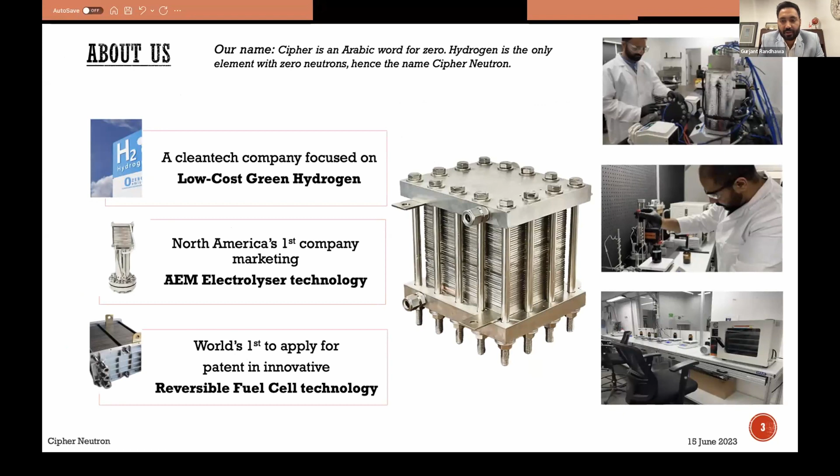So what is Cipher Neutron? We are a privately held company in Toronto, a Canadian company that focuses on low-cost green hydrogen solutions that include AEM electrolyzers. We also have a patent-pending innovative technology called reversible fuel cell. In this presentation today, we will talk more about the AEMs that we have, and then we'll touch a little bit on the reversible fuel cells.

I think it's very important - I know it's a hydrogen conference, and there will be people who already know hydrogen listening to this presentation. But it's very important to understand what the real market is and what the needs are for hydrogen, because whenever we discuss hydrogen, people usually think of hydrogen cars running, hydrogen IC engines, which are coming. I call them emerging markets. But the bigger section is existing markets - that's Cipher Neutron's focus.

If you look at the oil and gas industry, fertilizer industry, the butter that we eat every day, chemical production, mining industry, ore reduction - all these processes, all these sectors, they use green hydrogen or hydrogen. At this stage, they're using gray hydrogen, but the plan is to slowly adapt or change to green hydrogen markets. This represents billions and billions of dollars of market, and the expectations for 2030 and 2050 are into trillions of dollars of market.

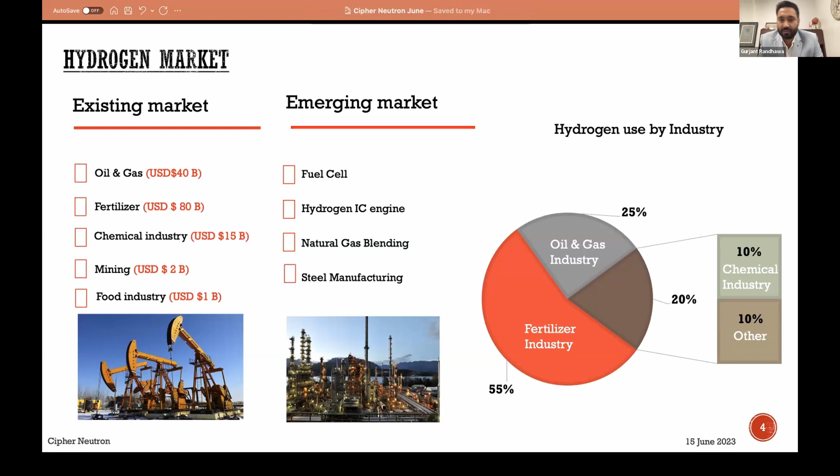So again, for all the electrolyzer companies out there, I don't see any competition at this stage. There's enough green hydrogen to be made. So again, we need to encourage more companies and encourage new technologies.

Existing production methods - as we know, there are mainly two ways to produce green hydrogen. If you follow the news, there are new companies every day, which is a good thing, but the existing market share is between alkaline electrolyzers and PEM electrolyzers.

Alkaline electrolyzers is a traditional way to produce green hydrogen. However, it comes with lots of disadvantages: a huge footprint, low hydrogen production, low pressure of green hydrogen produced, and a highly corrosive process.

Then we have PEM electrolyzers, which are now dominating the industry because of their high current density, meaning low footprint, high efficiency, and high output pressure.

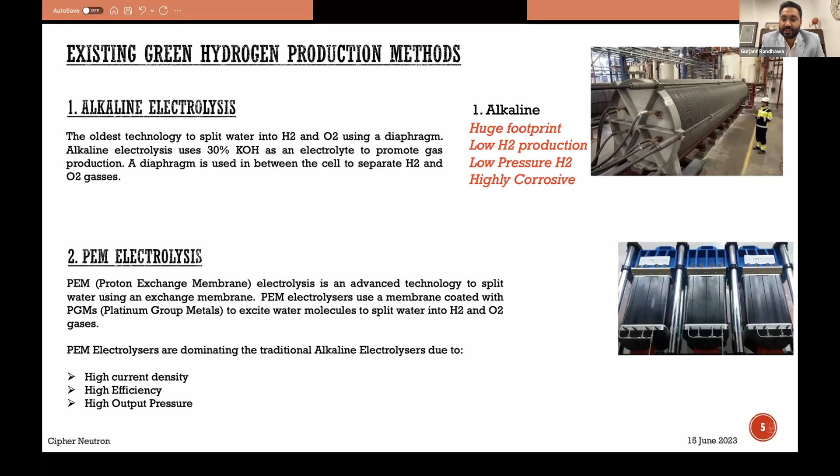However, these also come with some disadvantages, which include they are made up with PGMs, or platinum group metals. One of the key things in PEM electrolyzers to increase efficiency and performance is to use platinum, iridium, lithium - all these minerals or platinum group metals or rare earth metals. The second thing is the use of PFAS, especially in European countries now. PFAS is a big concern because the membrane used inside the PEM electrolyzers comes from PFAS.

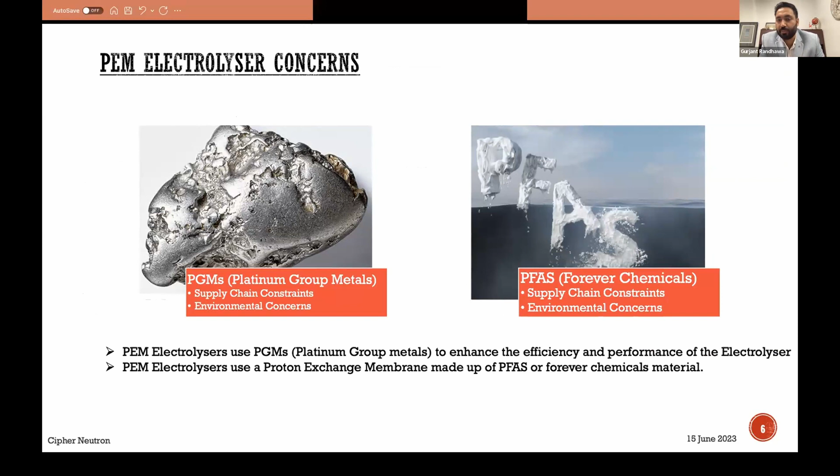Talking a little bit about the PGMs concern - because we're talking about trillions of dollars of market, we're talking about billions of dollars spent in research and development of green hydrogen technologies. But the thing is, we need to do a proper sustainability study. We do not even have enough iridium to justify the scale that we need, or the iridium that is required in the electrolyzers. So definitely we need platinum-group-free electrolyzers, and that's exactly what Cipher Neutron is doing.

Not only the iridium section, but also one thing to understand is more than 90% of the PGMs are based in South Africa. So anytime we have things like COVID-19 or some other sanctions, it will be very hard to satisfy the green hydrogen market in those scenarios.

They also have environmental impact, because then the question becomes, are we even talking about green hydrogen? Just to make 1 megawatt of PEM electrolyzers, we need anywhere from 500 grams to 2 kilograms of platinum group metals. One argument is that this number is okay because we can recycle it.

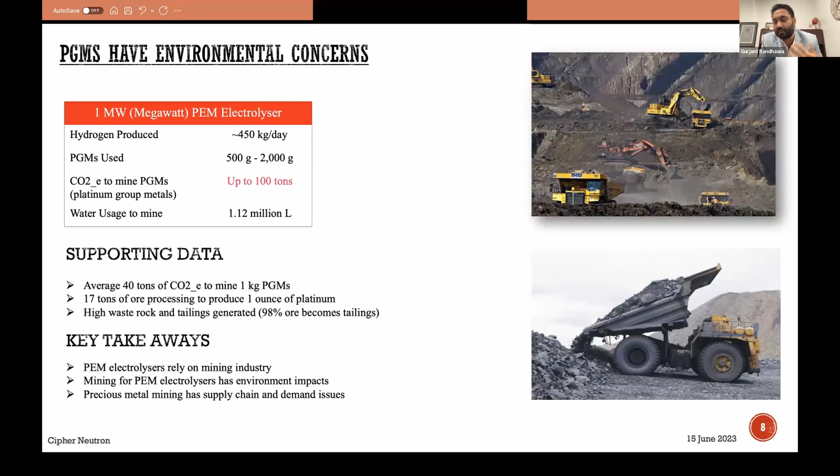The second big point is PFAS. Europe is actually looking to ban certain PFAS. PFAS are also called forever chemicals, and they can stay in the environment for thousands and thousands of years. According to the Agency for Toxic Substances and Disease Registry, PFAS has the potential to affect growth, learning, and behavior of infants and also older children. They can lower pregnancy rates and can also increase the risk of cancer.

So we need something which is PGM-free and PFAS-free. This is where Cipher Neutron's AEM technology comes into play. We have developed a highly efficient way to produce green hydrogen, and we do not use any PFAS or PGM-based minerals. We are the first North American company to deliver or commercialize AEM technology.

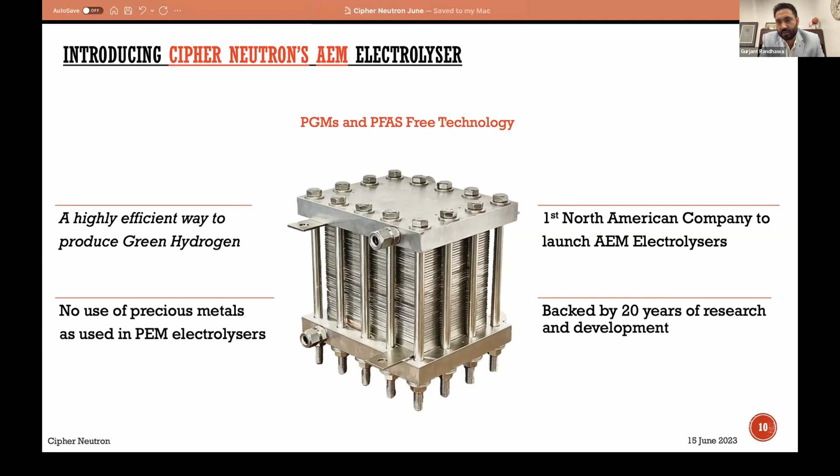Just one point to note, we are backed up by 20 years of research and development. Our partner, Dynacert, has been into research and development of alkaline electrolyzers and the green hydrogen economy generally for the last 20 plus years. So we do have the know-how, and we have huge research and development backup from Dynacert also.

The AEM benefits that Cipher Neutron's AEMs offer: we have developed a highly efficient system. Our efficiency levels are north of 80%, based on HHV levels.

If you look at the industry, the standard right now is 77%. So why is it important? Higher the efficiency means we can produce more green hydrogen with the same input power, meaning lower OPEX, operating cost.

This aligns with what the Biden administration said, and all the governments across Europe and across the world are saying, to bring down the price of green hydrogen to lower than $2 a kilogram. The idea is, if you have higher efficiency and lower capex, you can achieve this goal. Otherwise, it's not realistic to compete with gray hydrogen. That's why the efficiency levels of the electrolyzer have to be above 80% to even discuss challenging the prices we see from gray hydrogen.

High ampacity means we can produce more hydrogen per centimeter square. In our case, we have achieved 2 amps per centimeter square. Just one thing to note, in alkaline or traditional electrolyzers, the average ampacity is less than half an amp per centimeter square. So we produce 4 times or more hydrogen per unit area than traditional alkaline electrolyzers.

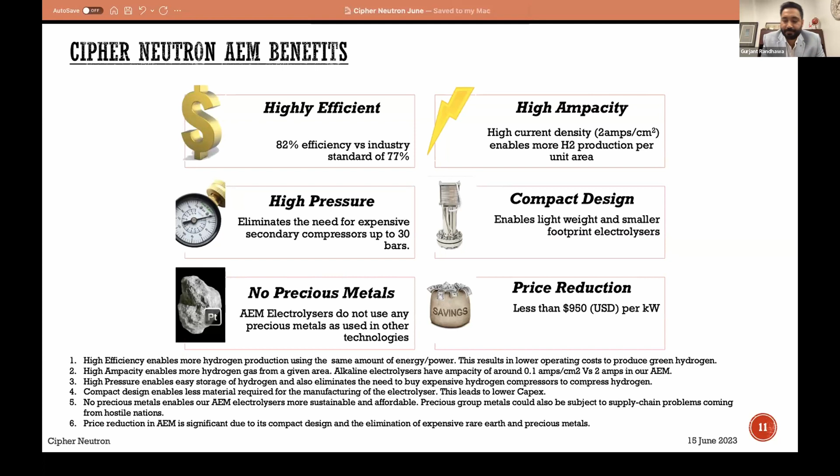So we have a compact design, no precious metal use, and a product price reduction. If you look at our prices, the AEM prices we offer — this is the selling price, by the way — for the electrolyzer, it's less than $1,000 USD per kilowatt. We will discuss the pricing in upcoming slides.

So why do we have a superior AEM technology? Any electrolyzer, especially AEMs or PEM electrolyzers, has main key components. There are three of them: flow fields, ink preparation, and the membrane.

We work very closely on our membrane with Ionomr Innovations, which is a pioneer in North America for developing state-of-the-art anion or AEM electrolyzer membranes. We have a very unique way to prepare our ink. The ink we prepare is coated on the membrane, and after that it excites the water molecules to break into hydrogen and oxygen gases. We have a unique way to prepare it, and a unique catalyst recipe that helps us achieve those efficiency levels.

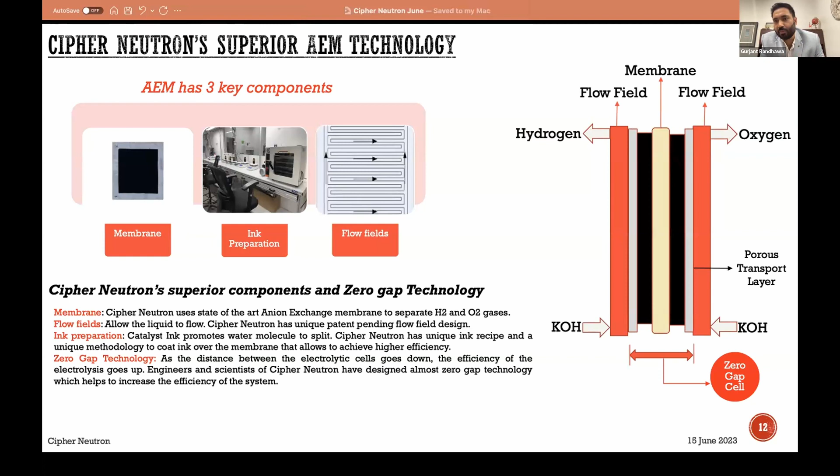We also have patent-pending flow fields that allow us minimum pressure drop and maximum water flow, which helps us achieve higher efficiency levels.

Minimum degradation is one of the things we already discussed, and I think one of the big concerns for electrolyzers out there in the field are the lifetimes. We have seen less than 0.5% degradation after 1,000 working hours, and this testing is done on a 10 kilowatt stack, a decent size stack, not a one cell or small 10 centimeter square cell. We have done this on an actual 10 kilowatt electrolyzer system. So if you extend that to 1 year, that will mean 4% degradation over 1 year.

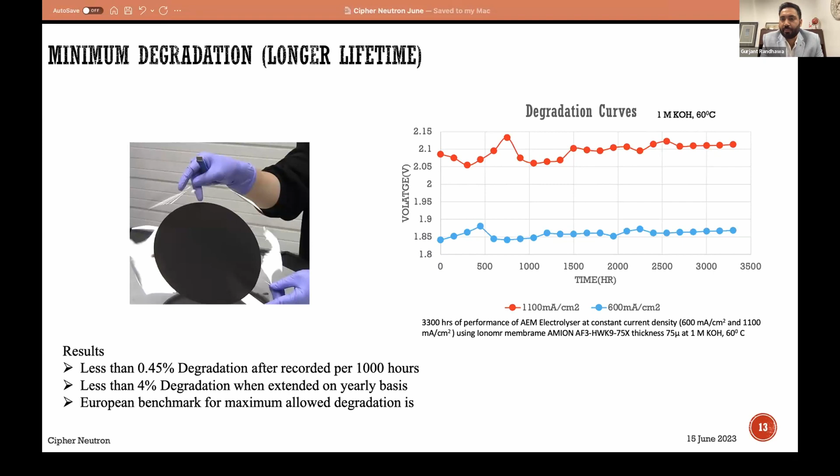We have run our electrolyzers for more than 3,000, 3,500 hours, and it's still going. We are testing them under various conditions, and we have seen minimum degradation levels. For the European benchmark, it's 7% or 8%, and we are almost half of that. So our AEM electrolyzers that we manufacture, we are predicting they can last 8 to 9 years, way more than traditional PEM electrolyzers can last.

Talking about selling prices, if we talk about electrolyzer prices, we know they're all over the map. If you source it from China, from Germany, from North America, there's a huge price difference. So we have done extensive study to find out what it would cost for any electrolyzer out there on an average basis. What we have seen is we are anywhere between 20 to 30% cheaper or more affordable than traditional PEM electrolyzers in the field.

Our selling price for a 10 kilowatt stack, which is able to produce almost 2,000 liters of hydrogen an hour, is $10,280. And this is in USD prices.

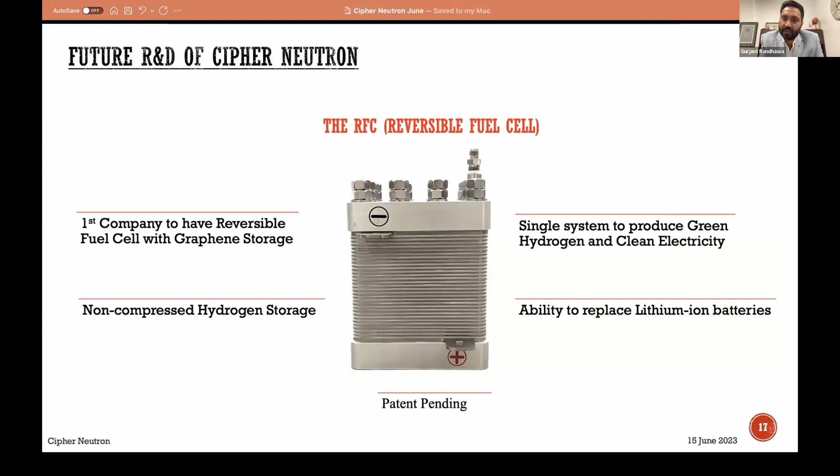The next step for Cipher Neutron is to make it a 5 kilowatt or 10 kilowatt system, because that's what an ideal house or ideal use would be for this kind of technology. If you look at the use case scenarios, this is perfect for energy storage, residential and commercial power backup systems, off-grid communities, hotels, cottages across the globe, and utility markets. So this is where our reversible fuel cell will be applied in the future.

If you look at the focus of all these things we're discussing, it's to reduce CapEx and to reduce OpEx, because for governments across the globe, including the Biden administration, the goal is to reach $2 per kg by 2026, and after that, less than $1.50 for green hydrogen by 2030. The only way to achieve this is to have almost an 80% reduction in electrolyzer cost.

Otherwise, as I mentioned, we shouldn't even be talking about green hydrogen in the next few years if electrolyzers are still at the prices we are buying them at today, especially PEM electrolyzers. They're highly expensive. They're not just a little over, they're almost 3 or 4 times the price they should be. So an 80% price reduction is necessary. And as we discussed in the previous slides, we're already 30% cheaper than existing PEM electrolyzers.

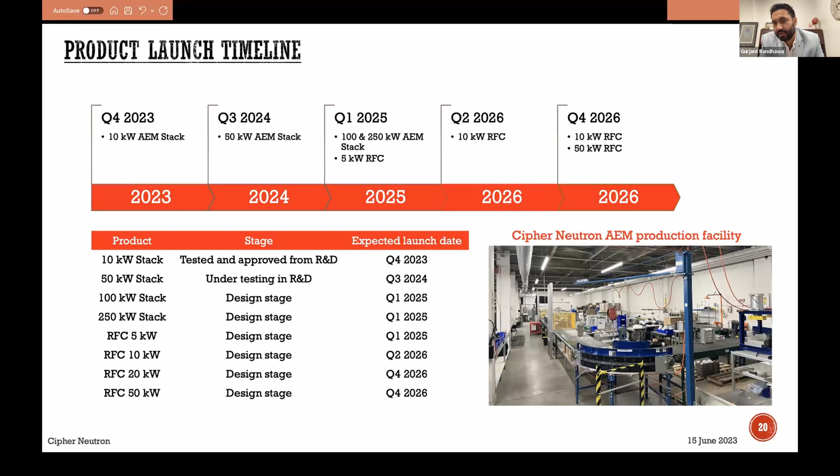We have several patents already filed. Our AEM electrolyzers are patent pending, and we are filing many more as we speak. Again, hydrogen right now is the best investment opportunity. Hydrogen is the future. It's a niche market, and what we have is a disruptive technology. We have no competition in reversible fuel cells. So I would say it's the best time to go into the hydrogen markets.

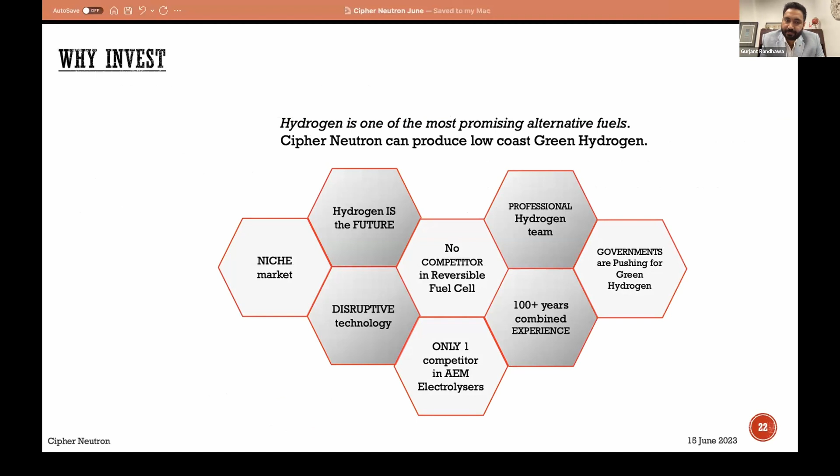Some of the news: as I mentioned, we just kicked off our research and development on 250 kilowatt AEM electrolyzers. We signed several MOUs across the globe to supply electrolyzers to mining companies, ammonia manufacturers, and chemical industries who want to make methanol. Every day the market is changing, and it's sometimes surprising what they actually use hydrogen for.

There are so many new products coming that use hydrogen, including hydrogen fuel cells and hydrogen IC engines, and all these will make sense only if we have green hydrogen as the fuel. We cannot use gray hydrogen and try to save the world from emissions, because that doesn't help. For hydrogen engines and fuel cells to work, we must have green hydrogen produced by water electrolysis, and AEM is the best way to go forward right now.